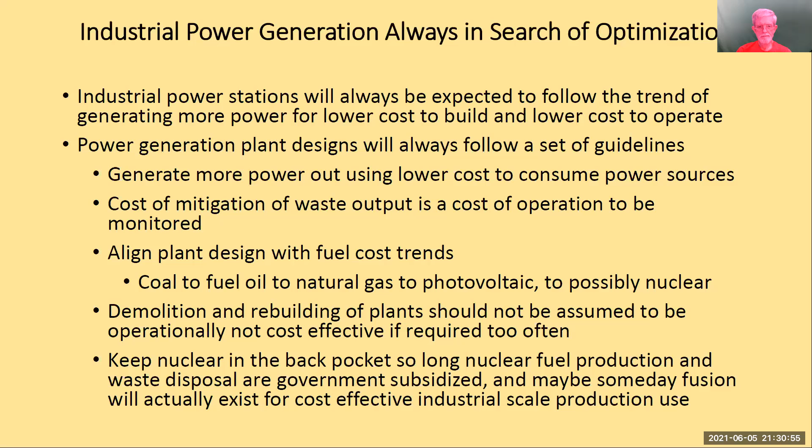Maybe someday fusion will actually exist and be cost effective, but it's nowhere near that for industrial scale production use. So as the saying goes, follow the leader, or in the case of business, watch the big boy. NextEra Energy is a division of NextEra, the parent company of Florida Power and Light. FP&L operates a wide variety of renewable source power generation stations throughout the world. NextEra is the world's largest producer of wind and solar energy.

They watch trends in industrial power generation and the startup and operational costs. In the state of Florida, NextEra has spent more than $2 billion to demolish and in an expedited manner rebuild through redesign a number of the power generation stations in Florida. So until fusion comes along, as of 2020, they've aligned on an approach that seems to be so optimal that they can actually hold out until fusion becomes extremely cost effective. It's solar electrolysis to hydrogen with liquefied natural gas as a backstop. They're referring to this as green hydrogen power generation station concept.

Most people don't know this, but FP&L has been looking at alternative power sources and actually operating plants outside of Florida for some time. You might have seen pictures of that solar furnace where they have a bunch of mirrors on the ground all pointing up to a tower, and in the tower it gets over 1,000 degrees, and they actually use molten salt as a heat transfer agent to make steam to produce the electricity.

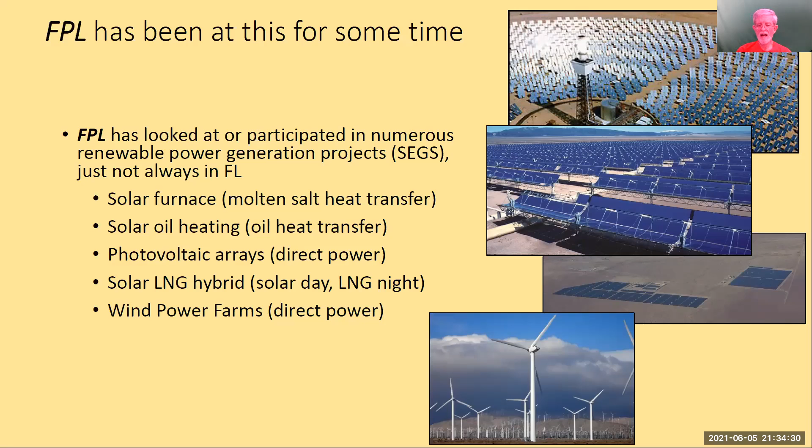And in a number of places across the US, FP&L manages very large wind power farms in Texas and on the Washington, Oregon border. So FP&L has been doing this for some time, looking at how do we optimize our power generation. Now, they don't make much fanfare about it.

They do publicly announce it and they put out press releases and such, but how many people were aware that in 2013, FP&L completely demolished the fuel oil burning power plant at Port Everglades in Fort Lauderdale? And in 2016, they opened a new power plant there. So in 2013, they demolished the entire area. And then by 2016, they had a new power plant up and running. They went from 4 fuel oil burning turbines to 3 liquefied natural gas burning turbines.

Excuse me, the old smokestacks used to put out tons of smoke, and the new ones are much cleaner. The new ones visually are cleaner, but liquefied natural gas, when it's burned, puts out a lot of CO2. You just can't see it. Right, right. But I mean the particulates.

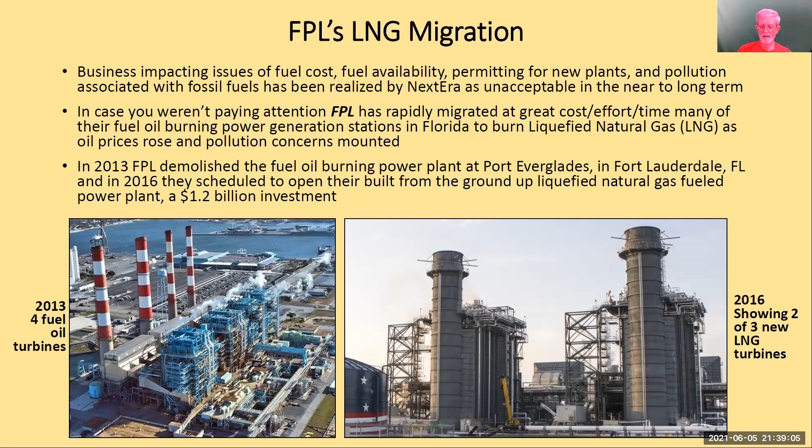And if you watch the FPL commercials on TV, they will tout our prices are lower than they were years ago. Well, you're consuming more power. So the rate may be lower, but your bill didn't really go down all that much. No. But yeah, congrats on converting from a more polluting to a less polluting, but still polluting technology. But they did it for the cost of power generation, money saving. Which is usually what we see.

Now, there isn't anything else that they could do that would make it better than what it is now? Oh yeah, they could have flipped it to solar. Oh, okay. And that's where we're going to get to, is how for the money they're doing this.

There are old Star Trek episodes, the original series, that showed these dilithium mining planets. They showed this lovely background diagram, and the industrial complex just going off into the distance, major, completely automated production plants. And when I first saw the FP&L power generation station on Southern Boulevard west of West Palm Beach, my first thought was, this is enormous.

They took land that they bought, scraped it all clean, and put in a liquefied natural gas burning power plant. And not too many years later, they literally doubled the size of the plant. And if you look next to it, there's an enormous lake that they use for cooling the turbines. So they bring in the water, heat it up, and then they discharge it back into their own lake. So it's a closed loop system.

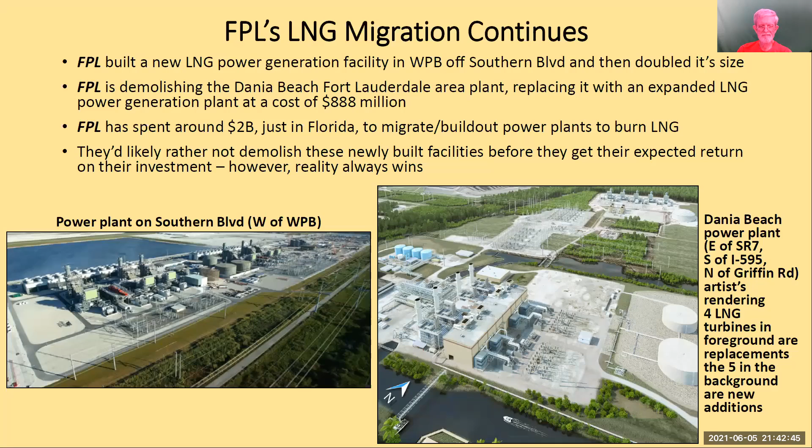So this is the right time to make solar panels or photovoltaics work for FP&L. Liquefied natural gas has kind of peaked out as being a very low cost source, and it has certain efficiency items that I have to deal with. Like I said, it produces CO2 when it burns, but you can't see it. So until somebody actually scratches below the surface and pays attention to it, they're okay with it. They've just spent a lot of money on those plants, and they'd like to amortize that over the next 10 to 20 years.

Photovoltaic cells right now have a lower cost than when they originally came out. They have a useful longevity. They're good for 10, 15, 20 plus years. And they can produce them and install them at industrial scale, because you don't have to build a giant building to put them out there. They're literally mounted on frames on the ground, and you don't even put motors in them to tilt them. You just have them always pointed in the optimal direction, and they're great.

There is a new kind of solar cell coming out called a perovskite cell that, rather than only converting the visible light into electricity, converts a much broader spectrum of light into electricity. So it can convert some infrared, some visible light, and a little bit of UV into electricity. So from an existing square inch of solar panel, you're going to get more power out of it. So if all they have to do is replace panels, that's a lot less expensive than demolishing a power generation station and building a new one.

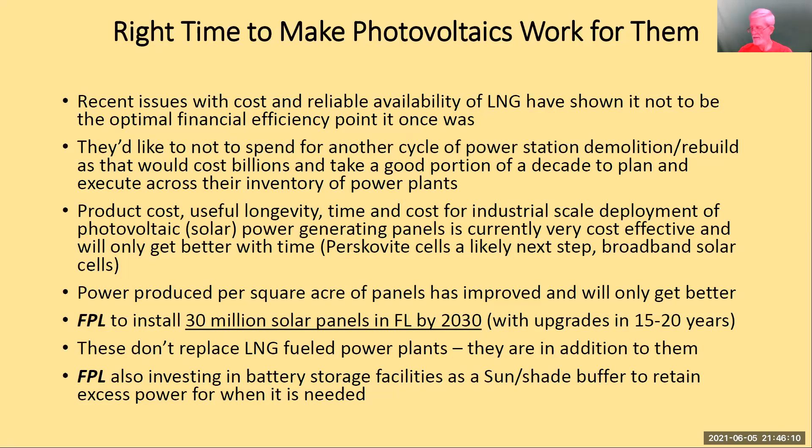If they made it 2050, would they put in 50 million panels? And they don't say what the size of them are. They're pretty much the standard size panels, the same size as you'd put on your house. They just have a lot more of them. Did you say there was a drawback by putting solar panels in? No. Oh, okay. Is there a drawback?

Other than the land that it consumes, because it does take a lot of acreage, but they're doing this out in the middle of, you know, Everglades or Everglades adjacent land where when you buy it in large quantities, the per acre cost is really cheap. Is there some reason they couldn't do it on top of buildings? No, commercial properties are doing that.

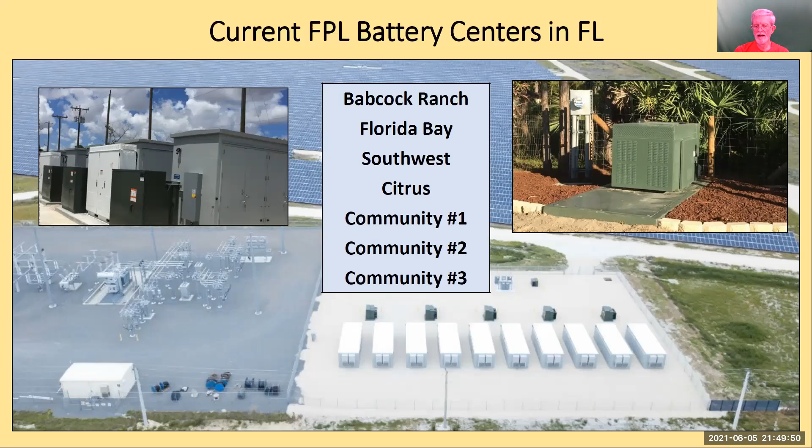So they put in batteries to avoid curtailing, which is also referred to as clipping or dumping. You've generated the power, but you can't make money off of it right now. So if you haven't got some way of storing it, then you're just dumping the money. But when you have 30 million solar panels by 2030, that's a lot of power generation. And if you don't need it on a dynamic basis, you have excess, how do you store it?

There have been a number of ways to do this. Batteries, but once you get a couple of megawatts worth of batteries, it starts to get expensive to have all those batteries. If we were a mountainous terrain, you could have elevated water hydro, pump water up into a dam so that during the evening hours, you can use the water running through a turbine to generate electricity.

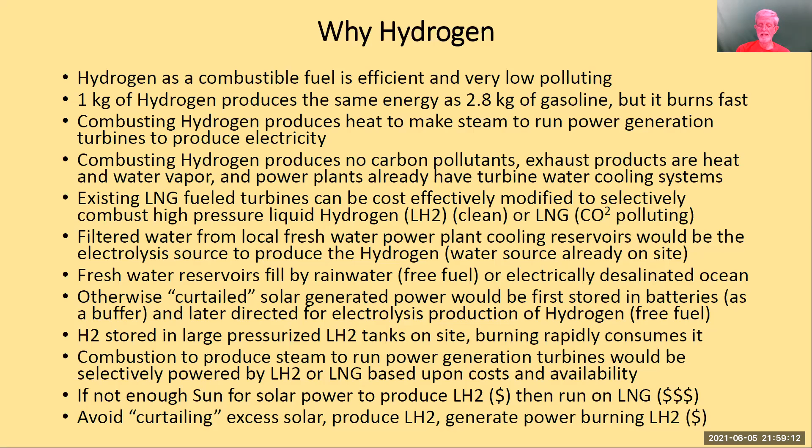But if you have an excess, you can run that excess across your grid over to your other power generation stations where you have a giant water reservoir, and through electrolysis, you produce liquid hydrogen that you can store on site. And you make the power generation station so that it can, with a flip of the switch, so to speak, burn natural gas or burn hydrogen. And they're doing that across multiple power plants in Florida.

So you can see it's a closed loop system here. And the cost for running, the fuel cost, is sunlight. That's the maximum endpoint. If it goes the other direction, they're back on liquefied natural gas. But they'd like to push it out so that solar excess becomes hydrogen, which they can burn as a buffer anytime they need it.

So here it is being put into practice. Over on the west coast of Florida, south of Tampa, east of Bradenton, in Manatee County, there is the Manatee Energy Storage Center, a large solar power generation array, and they've added $65 million worth of batteries to it. The battery storage capacity in late 2021 will be 409 megawatts in batteries. Okay? Wow, that's a big battery.

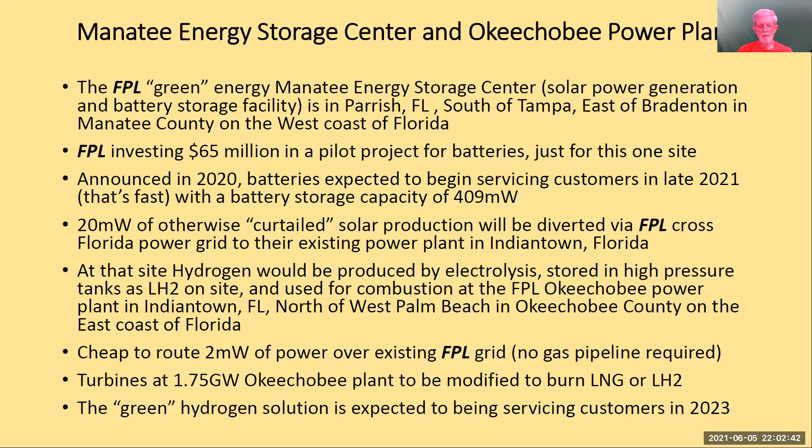Is this hackable? Can this be? Given that it's FP&L, I would say no. If it was some sort of fly-by-night Power R Us company, I'd say, yeah, you need to make sure it's protected. But given that FP&L is part of NextEra Energy, which is considered critical infrastructure for the United States, I think there's a U.S. federal office called the CISA, the Critical Infrastructure, I forget what the S stands for, Service Agency. They're the ones that monitor the power grid, natural gas, oil refineries, the big stuff.

Well, this is Florida. That's why I asked. This is at a federal level that CISA exists. Okay, good. Thank you. I could be wrong, but given the scale of what they're doing and how much they're spending, I think that they're considering things like, is it something that's considered critical infrastructure? Yes. Is it something that they're going to defend the technology? I think. Then, they could outsource something and do something stupid. And yeah.

So, this is the Cross Florida Green Energy Generation concept. Solar panels and batteries over in Manatee on the West Coast, and they deliver 20 megawatts over to the East Coast to produce the hydrogen stored on site, and then you can selectively burn hydrogen or liquefied natural gas as a backstop should you run out of hydrogen. So the downsides of electrolysis and storing liquid hydrogen.

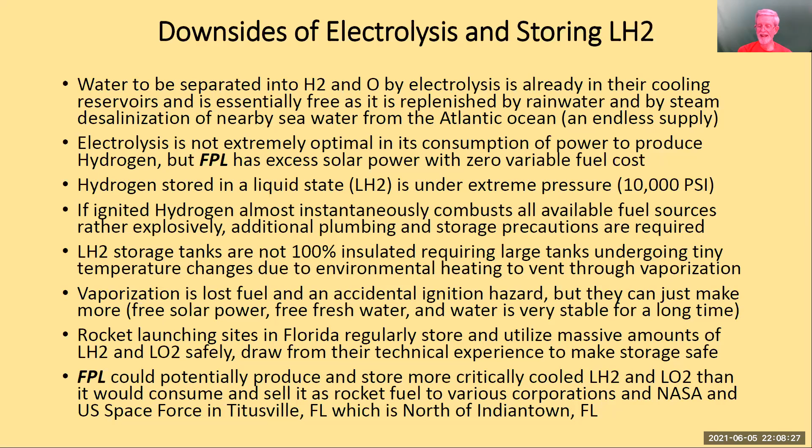So effectively, what they've done is created a closed loop system here. The panels produce excess power. They'll store it in batteries until they need it. They'll route it over the grid to produce liquid hydrogen. They'll produce the hydrogen from their existing water reservoir. They can store it on site in tanks. The hydrogen is less expensive than liquefied natural gas. So when they have the hydrogen, they spend less money to produce fuel. When they don't, then they have to use the liquefied natural gas.

You've got to ask yourself, though, if they're producing the power from hydrogen, are they going to have a discount on your power bill because the fuel costs drop considerably below natural gas? Or are they going to say, we didn't have enough hydrogen, so there's going to be a fuel surcharge for when they had to run on natural gas? One can guess which way they're going to go with this.

So the hydrogen fueled turbine exhaust is non-polluting. It's water vapor and lots of heat. Over time, they can expand the number of solar panels. They can replace them with more efficient ones. They can add more batteries. They can replace the original batteries with more efficient batteries. These are all incremental upgrades.

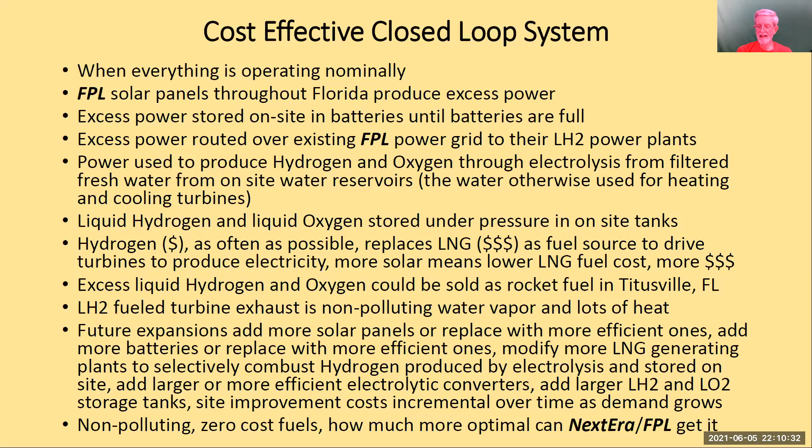The one remaining downside they have burning hydrogen is heat. So burning hydrogen produces water vapor and heat. There's no carbon pollutants. It's very efficient, produces an abundance of heat. Like I said, it burns hotter than gasoline. So you take the heat, convert it to steam with water to drive turbines to produce electricity.

But they have far more heat than they can actively utilize to heat up the water to run the power plant. So they would have to dial it back because you're going to get more heat from the hydrogen than you're going to get out of the natural gas. So how do they dispose of the heat currently? They pass it into water. Oh, okay. Passing into the water is going to make your water reservoir hotter, which warms up the air, atmospheric heating.

What they could do is do what NASA does with deep space probes. Take thermocouples, take the excess heat, and produce more electricity, which would be interesting because now they can take what would be a waste product, their excess heat, and use it to produce even more electricity. So you can think of it as the excess heat, having to deal with it is another form of curtailing. But finding a way to take the excess heat and produce even more electricity from it, it's another win. So we'll see what they do with the excess heat from the hydrogen combustion.

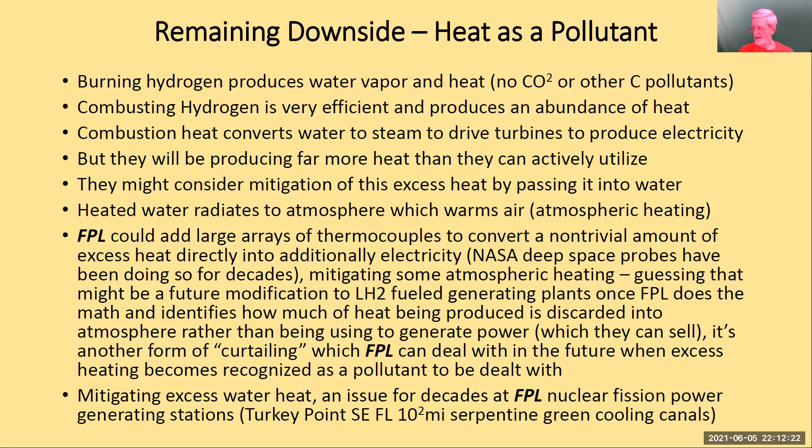That actually takes the heated water coming out of the turbines and runs it down zigzag pathways to dissipate the heat into the air. But the water in South Florida can't get cooled fast enough, so the water stays warm, and green algae just loves that warm water, which is why the canals are all bright green. So, you know, you're not going to build a canal system like this around all of the hydrogen burning power plants. You're going to have to find a way to deal with the excess heat, and they need to look at thermocouples.

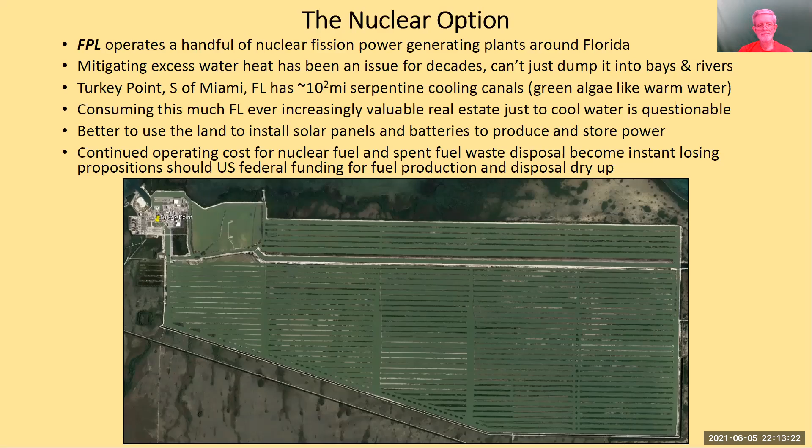So, conclusions. Big corporations always look for a way to spend some money to redesign things and, you know, make more. So this current solar to battery to electrolysis to hydrogen, that's just the latest transition. Nuclear, that says fusion, you should say fission, is coming under increasing scrutiny because of what happened in Japan with Fukushima. And if they ever lose the federal subsidy for fuel and disposal, they could shut those plants down pretty quickly. They haven't built a lot of new ones recently because of all of the environmental licensing you have to have.

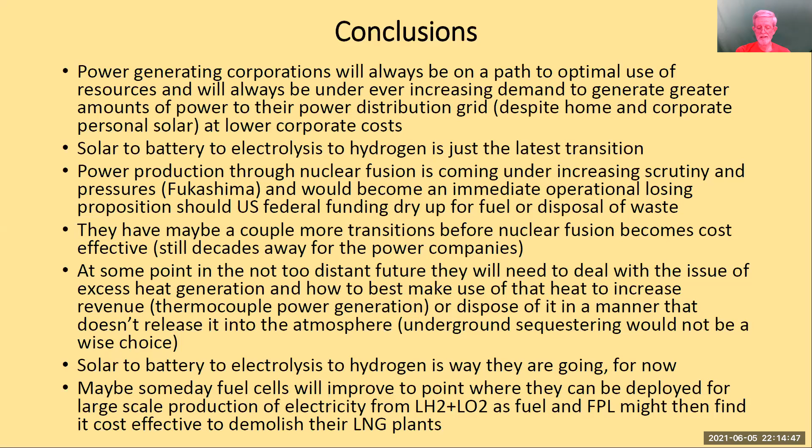So before fusion comes online, which is always decades away in the future for big power companies, they can use this hydrogen approach very effectively. So the way they're going for now is their green hydrogen approach, which is this end-to-end closed loop system. So maybe someday fuel cells will improve to the point where they can be deployed for large scale production of electricity, and they can get rid of the turbines and the natural gas fired power plants, but that's a ways away. Any questions, comments?

I have always been under the impression that, except for Texas, the whole country is connected by this big grid. Am I wrong on that? Not everywhere is connected. When you get into smaller cities that have their own local power generation, they aren't connected on the grid. Oh. But California and its neighboring states are definitely connected on the grid, and they've had pluses and minuses as to how cost effective it is, depending upon whether you're the abundant power producer or the not producing enough power needer. And like I said, Texas has isolated itself from the US grid.

Adam has a question on the chat. Okay. I will apologize here that I haven't been minding the chat. I've only got one set of eyes that I was staring at the program, and this is the screen. Okay, let's see here.

Yes, the official report on the UFOs has been delayed. Like I said, later this month was their original estimate.

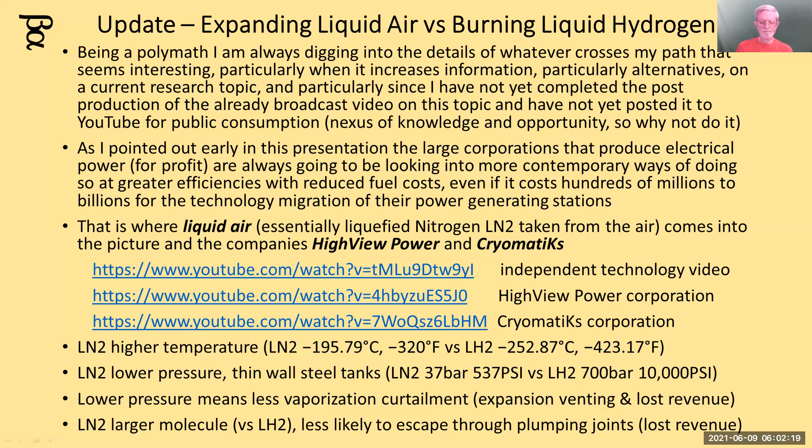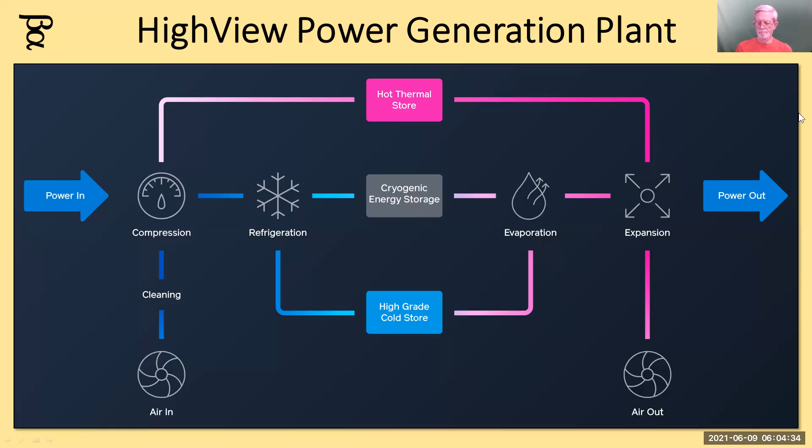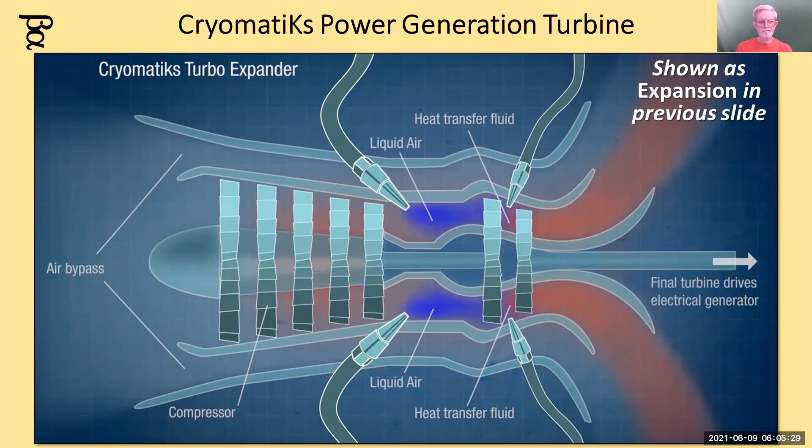So why wouldn't Florida Power and Light go with the liquid nitrogen expanding air as opposed to using liquid hydrogen? Well, the answer is simple. They had just spent a lot of money demolishing and rebuilding power stations to switch from fuel oil to liquefied natural gas, and it was much easier to just modify the burners to burn liquid hydrogen or liquid natural gas selectively than it would be to make them be propelled by the expanding gas pressure of liquid nitrogen. So, why demolish the plant and build it again? Because you just did that recently. If you can adapt the process to burn a different fuel, it's much more cost effective.

So once FP&L gets more deeply experienced into this solar producing, stored gas, then consumed as a renewable fuel, the next time they have to demolish and rebuild plants, they may consider liquefied air. Or if they have to build any new plants, they may consider liquefied air over liquid hydrogen, because there's a number of factors. The biggest one is cost of storage, which is, if you lose anything through the storage process, that's lost fuel for your generator.

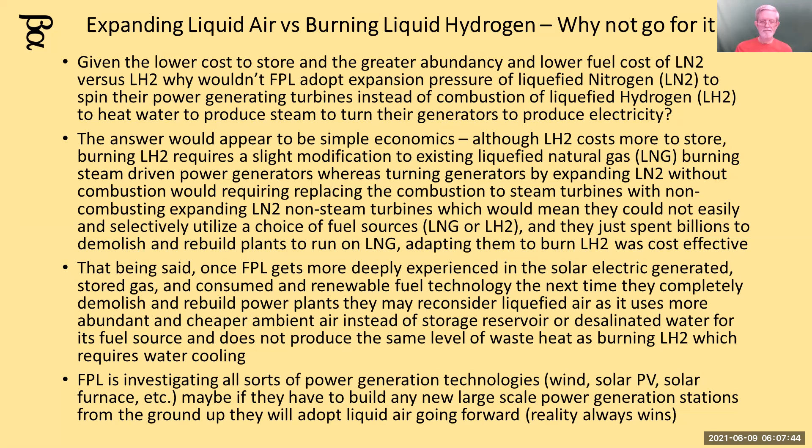So along the lines of making things even more efficient, why not go the next step and do away with the turbines and the generators and the moving parts and generate electricity using solid state technology? There's a physics principle known as the Seebeck effect, where a temperature differential between dissimilar metals, normally thought of as thermocouples, or specific chemistries in solid state chips, can actually induce a flow of electrons, essentially produce electricity from the heat differential. This is also referred to as the thermoelectric generation of electrical power, or TEG. And small versions of these devices are commercially available right now at relatively low cost. And they are also used by NASA for deep space, larger power production for spacecraft.

So if you think of the currently active NASA missions of Curiosity, Perseverance, Voyager 1 and 2, and New Horizons, they all use plutonium to generate about 400 degrees Fahrenheit worth of heat to heat up thermocouples against the much lower temperature of the vacuum of space, and that generates electricity. No moving parts, no turbines, no generators. It's just the heat differential producing a flow of electrons, which is electricity. Historically, additional missions have also used radioisotope thermoelectric generators, or RTGs. Cassini around Saturn, Galileo at Jupiter, earlier the Ulysses spacecraft, Vikings 1 and 2, Deep Space 1, and Pioneer 10 and 11. They all used thermoelectric power generation.